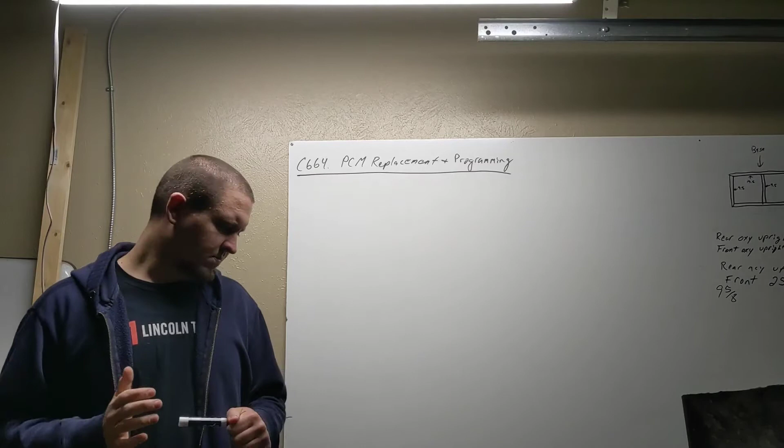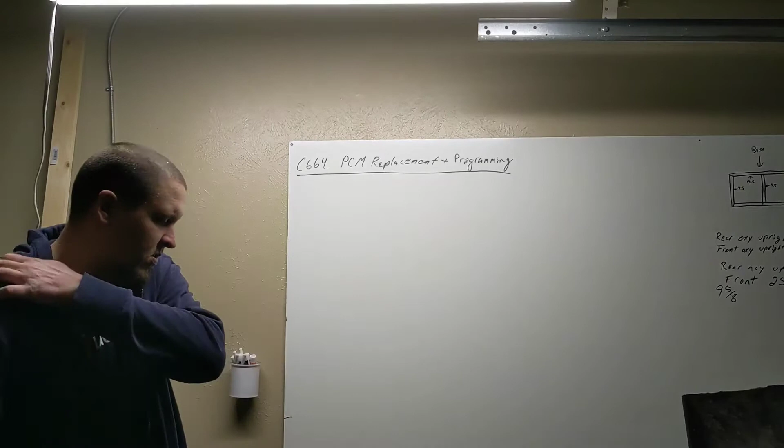To begin, we're going to use our scenario of a no-start condition. If you lose one of the major modules, a lot of times the whole network will go down, and if the whole network's down, the vehicle's just not going to start, because all these modules need to talk to each other to verify all the conditions are right for starting things up. Things like the PCM, the powertrain control module or engine control module, are responsible for sending the signal out to hit the starter. So if that module is down, we can't even start the vehicle. It can really take down the whole car if we have some module problems.

Before we get started, I just want to say that I was in the field for 15 years and I've probably replaced 5 to 8 PCMs, maybe. So it's not as common as people necessarily think.

A lot of times we get people from outside shops. Since I was at the dealer, outside shops would tow a vehicle to us and say, hey, we put a PCM in this thing, we just need you guys to program it. So they tow it to us, expect it to get programmed real quick, and then they drive it back home. But 99% of the time, we'd reprogram it and it wouldn't fix the vehicle. So it's not as common as you think.

A lot of people kind of get stumped and think, oh, well, it must be in this magic box that I don't know that much about. But the point of all this is for you guys to know some things about it so that you don't end up in that situation. That's just kind of the way it works.

But we've got our no-start condition. The first thing we want to do is check for codes. There's things we call U codes - those are always going to be communication codes. So if we look up a code in our PCM and we have a misfire, it's going to start with a P, and that's a powertrain code. Well, anything that starts with a U is going to be a communication code. So we need to scan all our modules and see if we have any communication codes. Say you lose a PCM, you may have communication codes in all of your other modules saying, hey, we can't talk to the PCM. That kind of points you in the right direction.

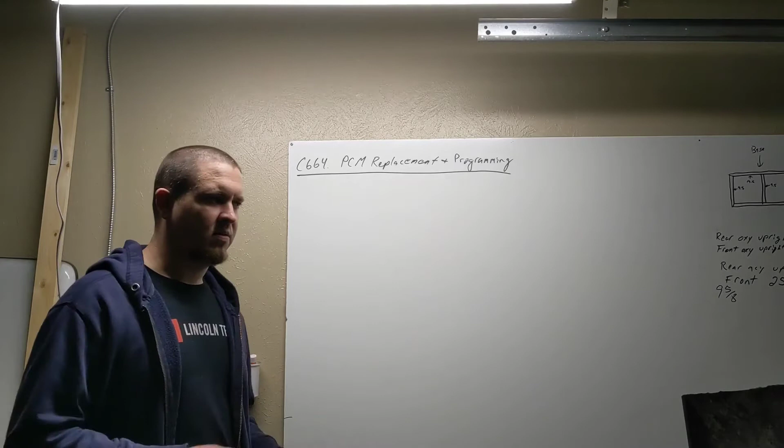But if you went with your scan tool and tried to pull codes out of the PCM, it would maybe say that module is not connected or it can't communicate or something. So there's another clue right there that you're in the right spot. That's what we need to do - this is the same thing with most of our other diagnostic strategies. We need to isolate and focus down and find out where our problem is. So we need to isolate which module isn't communicating, and then we can start testing from there.

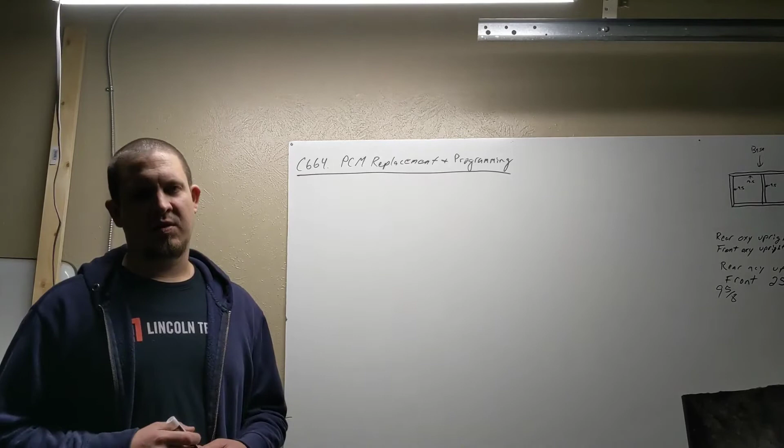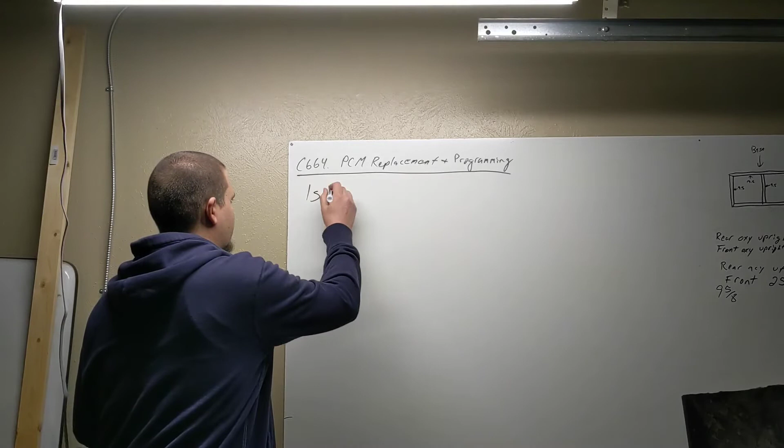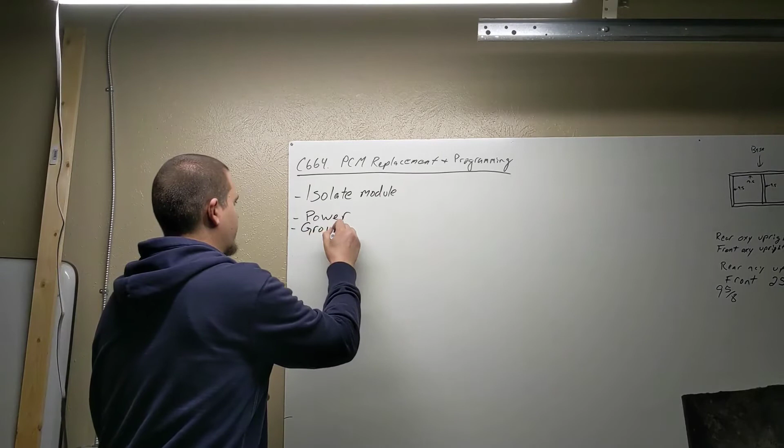So once we find out that our PCM isn't communicating, we need to basically check all our powers, grounds, and communication. So first we isolate. After that, there's three things that a module needs: power, ground, communication. That's what a module needs to operate. I mean, there's a little bit more to it, but if you have one that's not functioning properly, not talking to other modules, these are the things you need to look at.

Now there are some other things that can happen. I've replaced PCMs for things like injector drivers failing inside of them - it'll just have one fuel injector that can't turn on for whatever reason. But you can still communicate with it, you can still talk to the module. So this is more if we're not talking to it at all - power, ground, communication.

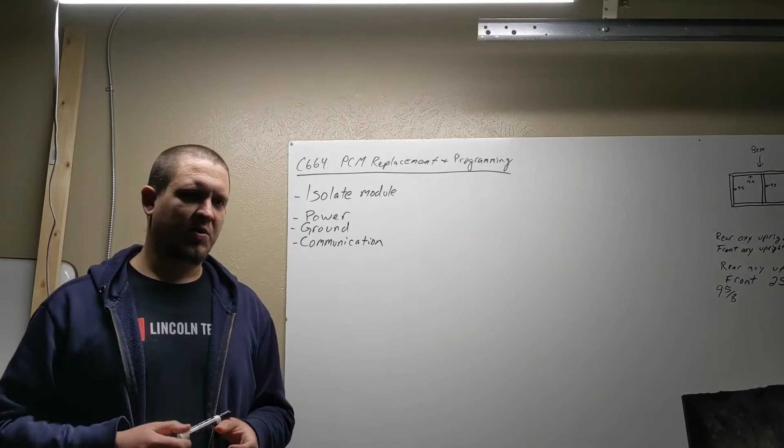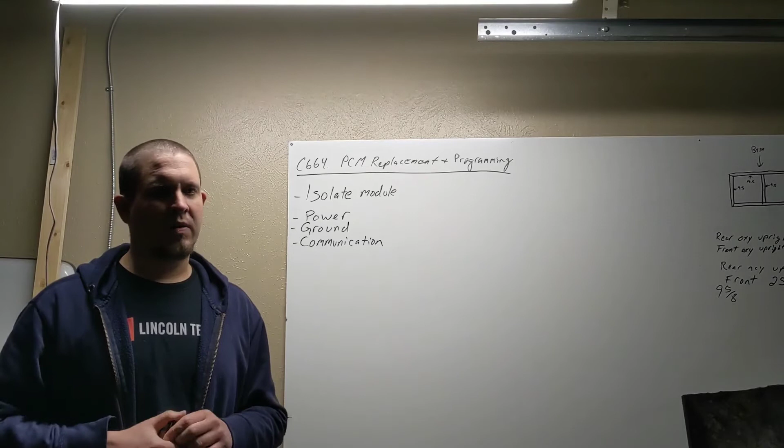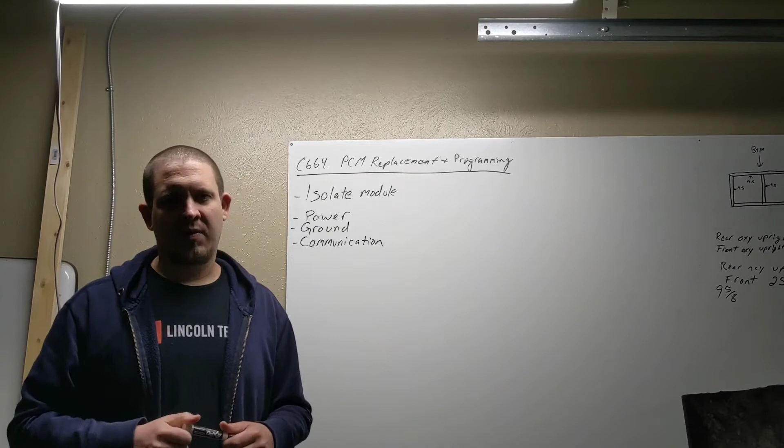So when I do power, you pull up a wiring diagram of your PCM. The other thing I like to do is pull up the connector end views, where it just shows all the different pins in the connectors. You want to look through all those diagrams and connector end views and look for anything that is power - anything that says battery positive or ignition feed or anything like that. There may be 20 different power wires coming to that PCM for various circuits. I'll check all of them, make sure you're not missing anything at all.

So it may take a little bit of digging to get around in there and actually find all of those power wires, but you really need to verify that it has everything that it needs.

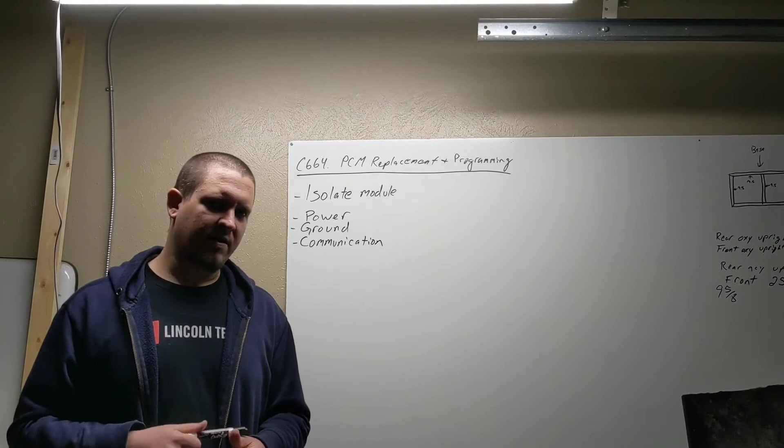After we verify we have all our powers, we need to do the same thing with grounds. We need to be looking at diagrams and connector end views and do the exact same thing with our grounds. Check all your grounds, maybe use an ohm meter, make sure you don't have a bunch of resistance on one. Obviously make sure you have continuity from your grounds to your battery.

You may need to run some voltage drop tests if you think you have a ground that's maybe suspect. Keep in mind that's another thing you can do, voltage drop tests, if you guys remember that from your basic electrical courses.

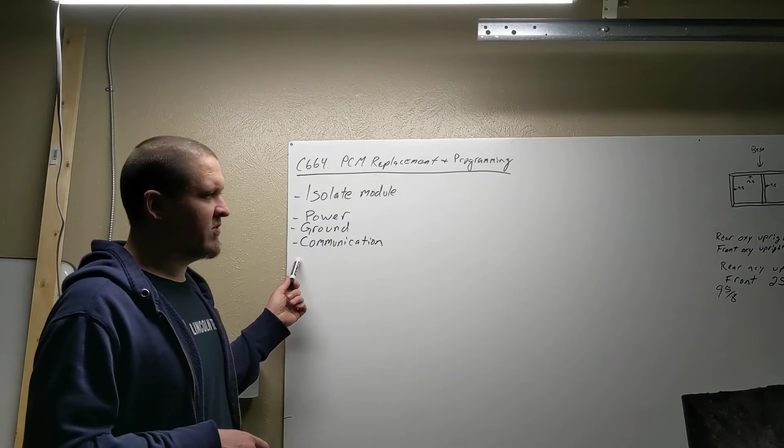After that, we need to look at communication, because we could have all our powers and grounds, but if for some reason our communication lines are down, we just can't talk to it. So we need to verify that we have communication, and that's kind of where the U codes come in. If a bunch of other modules are saying, hey, we can't talk to this thing, you need to check some of those data lines. You can do it the same way you'd check your powers and grounds, using an ohm meter to ohm out, say, from the PCM to a transmission controller or something, to make sure those high-speed data lines are up.

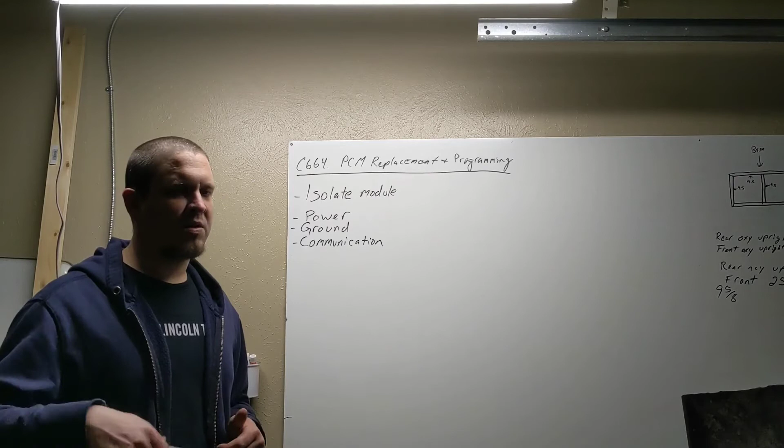I believe we'll talk a little bit more about this kind of stuff in some of the next units. So if some of these terms aren't really making sense to you, either ask me for a little more clarification, or we'll get there. I think some of that stuff's coming up. But we need to check our communication, make sure that all those lines are good.

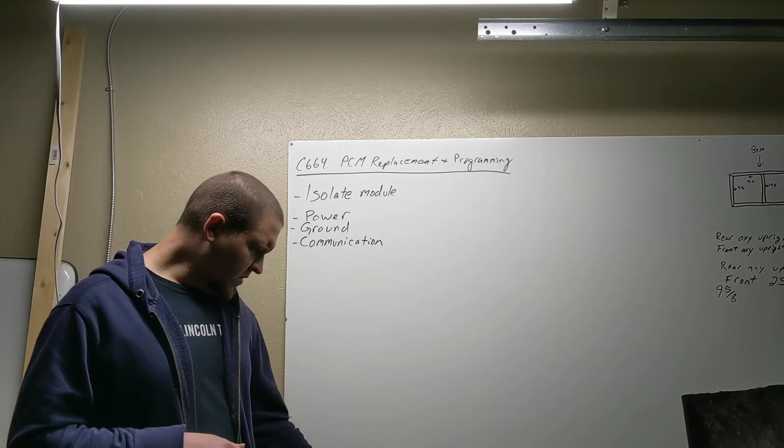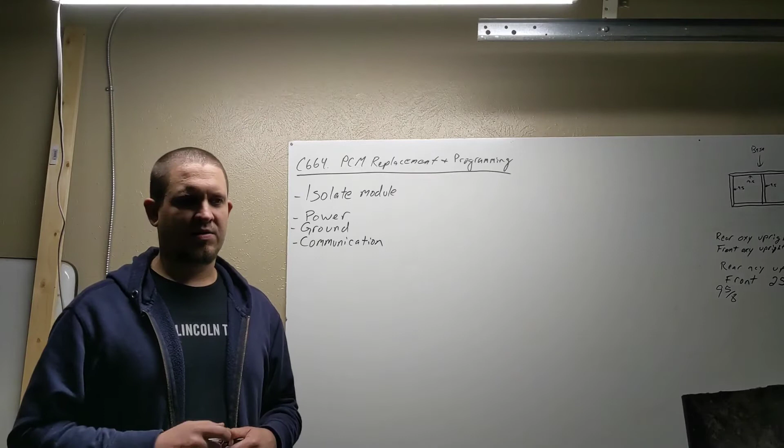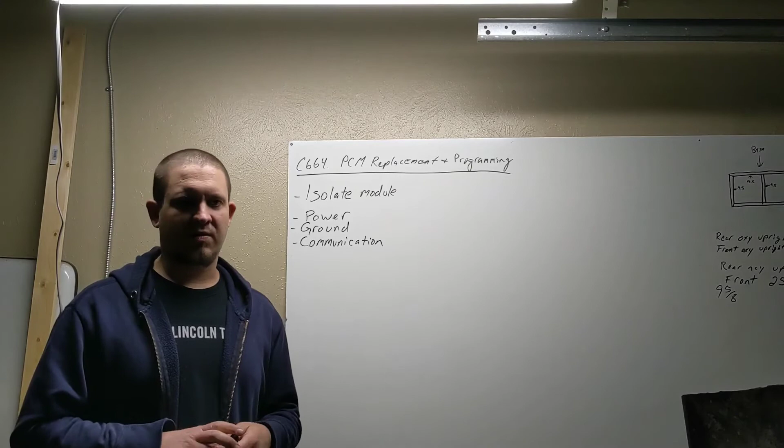Another thing we can do on communication, and I think this is one of the things coming up, is hook a meter or a scope up to our data lines. They'll produce a waveform also, like you guys saw in the other videos on the sensors, but they switch high and low. The sensor in the previous video, those were going 12 volts to 0. A lot of these data lines switch from like 2.5 volts to 0, and they switch real fast, and that's basically how they talk to one another. So you can pick that up on a scope to verify that there's data trying to come into the PCM. The PCM just isn't listening to it for whatever reason.

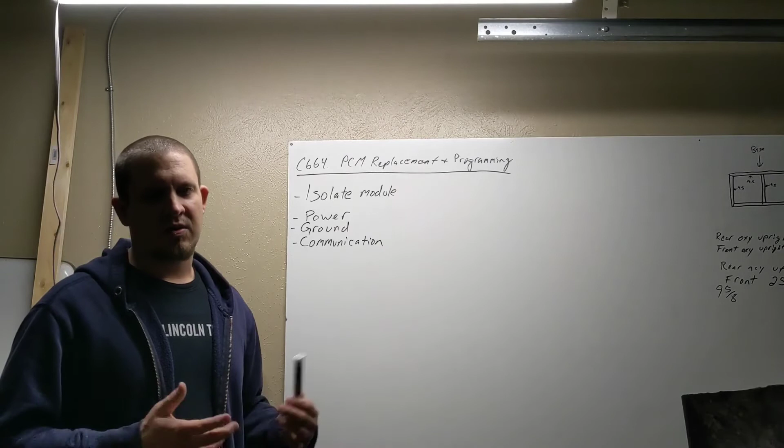So after we have checked our communication, we've got all three of these things that we need to have, and we know our module's dead for whatever reason. After that, we're going to replace our module.

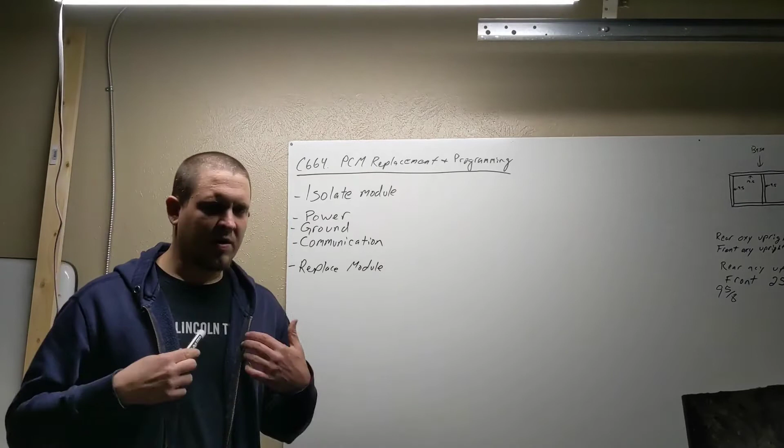So I'm going to talk about what I know specifically from my experience. I haven't reprogrammed modules on any other manufacturers but General Motors, but I have done a lot of programming on various modules over the years.

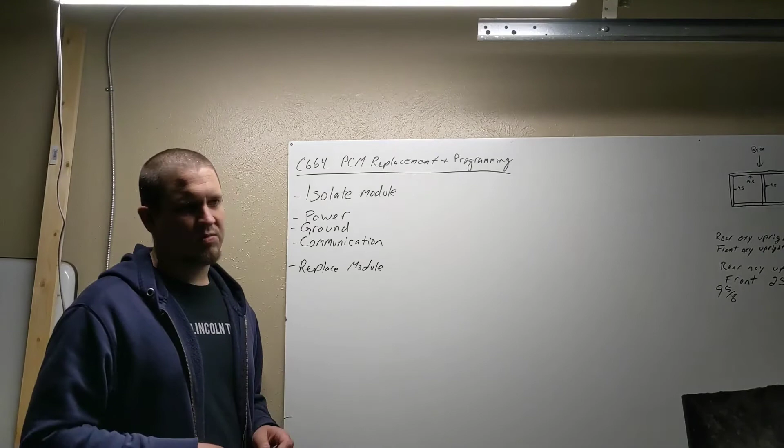There are some things you kind of need to know, and it's going to be a little bit different based on model and year. That's one thing that changes quite a bit, is how we're going to program stuff. Some of the older ones you had to take some steps before you replace the modules, even some of the newer ones too. So make sure you're checking service information.

For your programming steps.

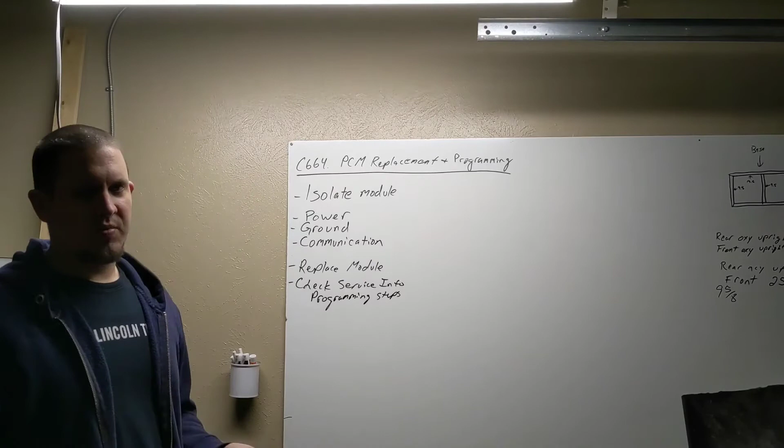If your module's completely dead, obviously you're not going to be able to pull maybe your old VIN or something out of the old module, but you may need to put in a VIN, especially if you're doing a powertrain control module.

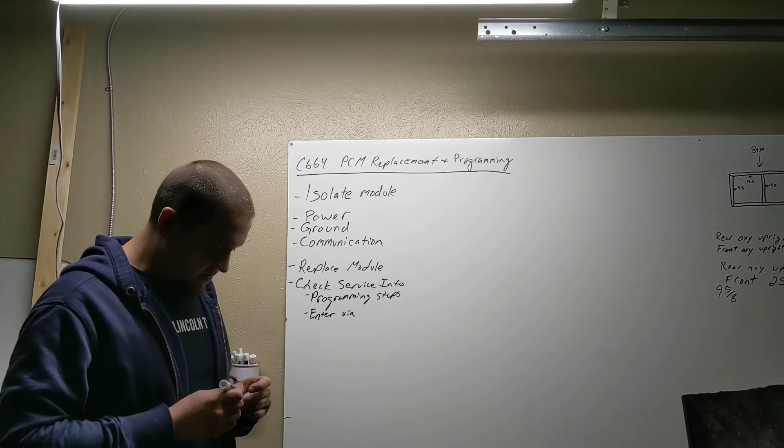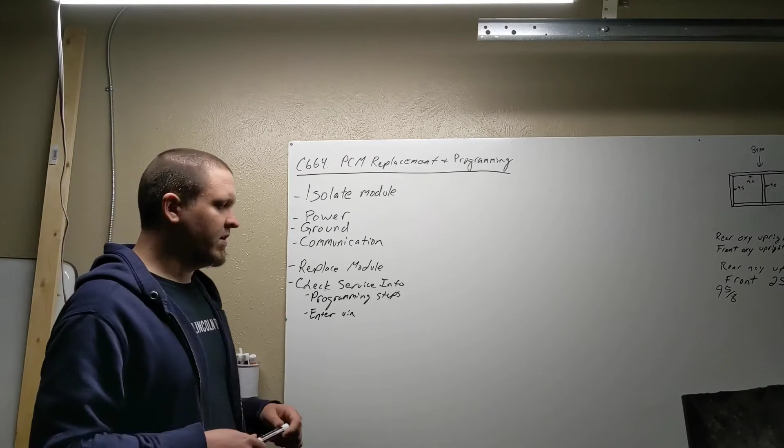Once we get started on our programming procedure, and I'm going to try and find some videos that kind of show this also, some of the steps on how you actually do this stuff. But if you need to enter a VIN, you're going to enter a VIN. Sometimes you'll need to choose a specific calibration, so there may be some options.

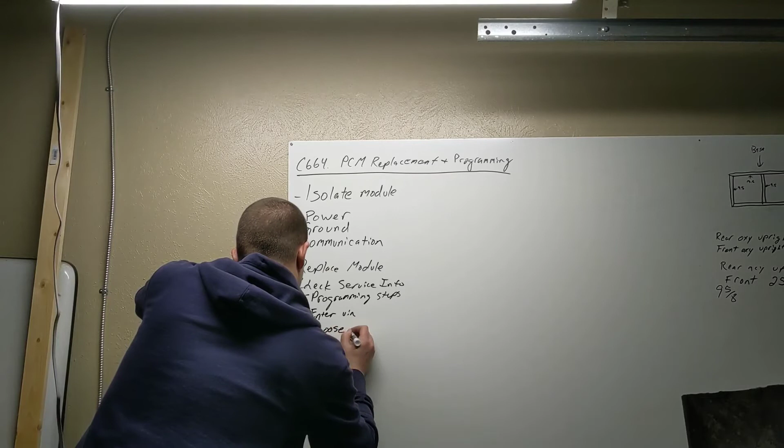And some of the options may say, pick this calibration if you have a pickup versus an SUV, or if you have this engine versus that engine. And there's something else in the GM world they call RPO codes. That means regular production options, and that's just options that the vehicle may or may not have. So sometimes you have to go in there and select those things specifically, and you may need to look up specifics about the vehicle to actually find those.

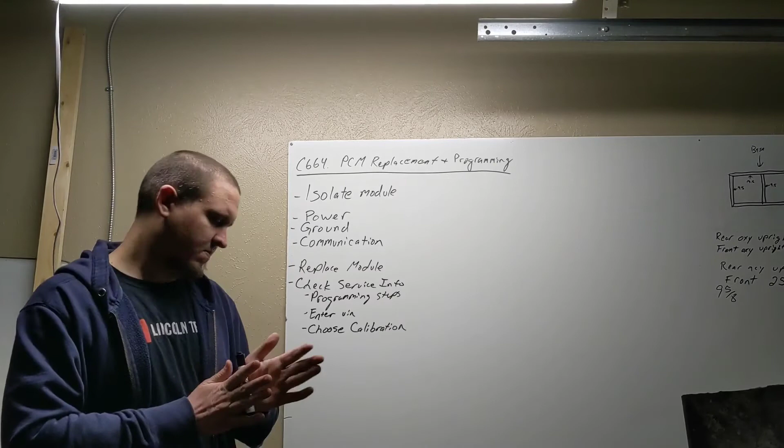But you may have a different calibration in there if you have, say, a 6-speed transmission versus an 8-speed, or if you have this kind of climate system or that kind of climate system. So it just kind of depends, and it's going to be different for pretty much every vehicle. It's kind of important that you get the right calibrations in there, or things just aren't going to work right.

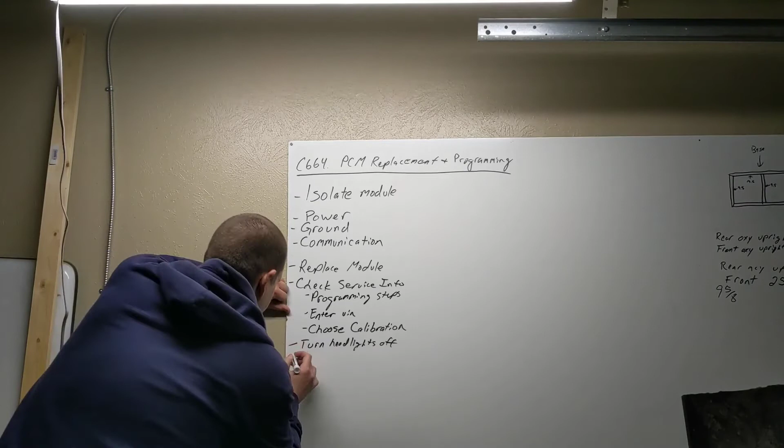One thing to note: sometimes programming takes a little while, could take a half hour all said and done, but you're just sitting there with the key on. The last thing we ever want is for the battery to go dead while we're in the middle of programming. So one of the first things I always do, whether reprogramming or not, when you pull a vehicle in with the key on but engine off, is turn your headlights off. That's a big draw on your battery and it's pretty unnecessary in the shop. But we need to maintain our battery voltage.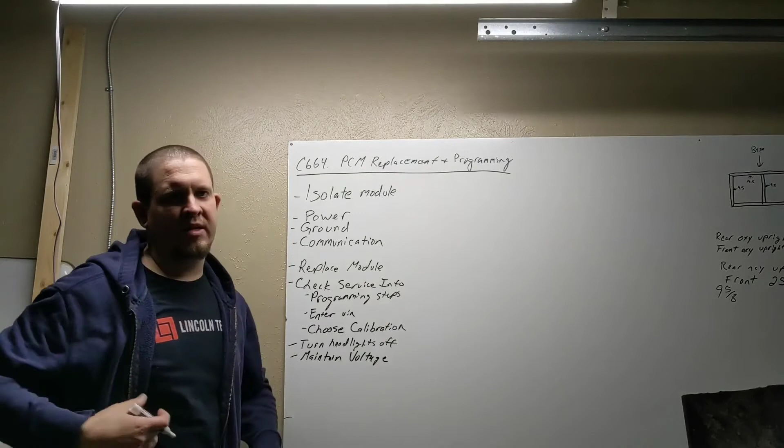There's two different ways we can do this. You can use some sort of battery charger or maintainer, or you can use a jump box.

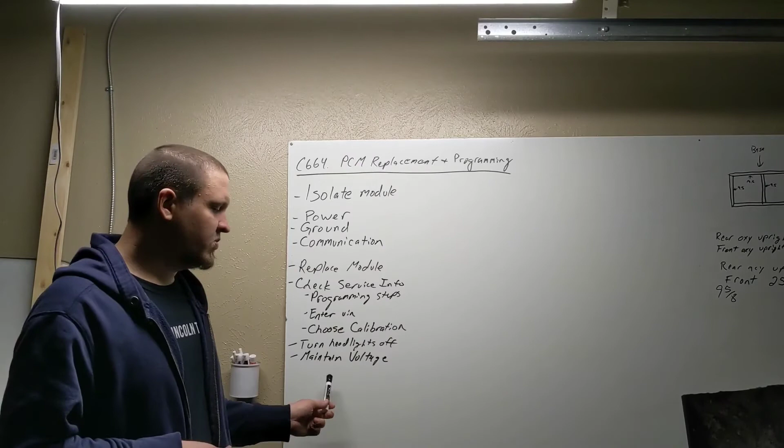Now, things that need to be said about that. A standard battery charger that you get from a normal store, that you probably have in the shop and may have used before - don't use a regular battery charger. Those things don't put out very clean power. They're fine for charging a battery, but when you're reprogramming and putting data into a module, there's a thing called AC ripple, and it's measurable. You get a little bit of AC voltage, a little bit of noise that comes into the system when we use these battery chargers, and it can mess with your programming. So don't use your regular old battery charger.

Some of them can specifically be used as a power supply, or what we call a battery maintainer, and those give out very clean DC voltage. If you measured it with a meter, it's just a flat line, straight DC voltage. If any of you guys have used the Midtronics GR8s we have at the school, those have a power supply mode and supply clean voltage, so you could use one of those. Midtronics also had a battery maintainer they pushed out to all the dealerships years ago, specifically for maintaining voltage for programming. They won't charge a battery or do anything like that - they're only meant to keep that voltage up so we don't die while programming the module.

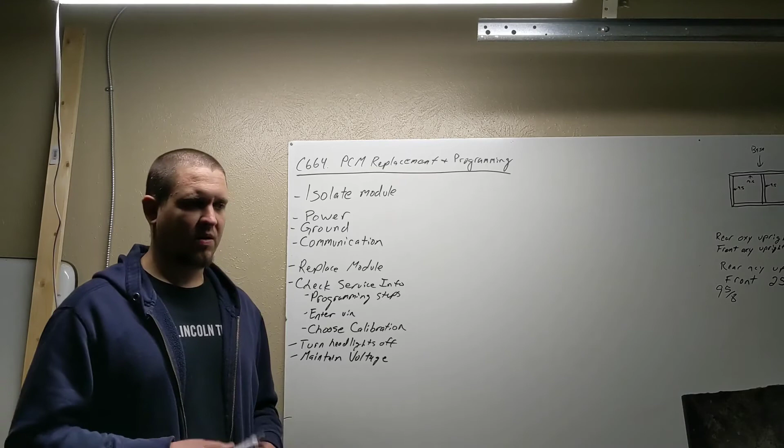Now, the other way you could do it is with a jump box. That's the way I always did it, just because I had one. It's not a charger, but it's going to assist - it helps keep that battery voltage up. It's just hooking another battery to the vehicle, so there's no AC ripple or anything in there. It's just going to take a lot longer for the battery and jump box to drain versus just the battery alone. So it's a whole lot quicker and easier - you don't have to worry about a bad charger messing up your program. That's what I would always do if I had a jump box handy. It's something to keep in mind because it can cause problems.

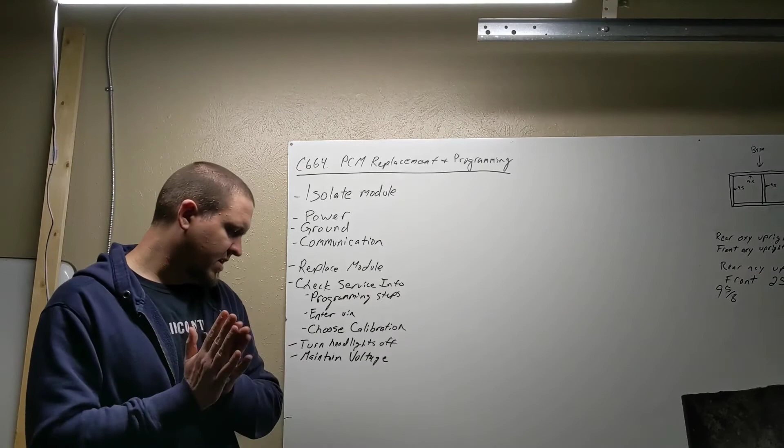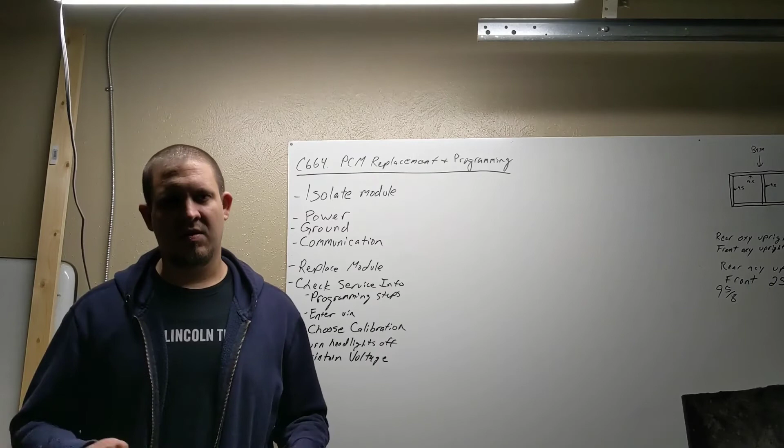So after we've got our battery voltage maintained, we can go ahead with our programming. Once you start it, it's going to do its thing - load in its program, and then it'll probably give you some prompts, maybe make you make some decisions, tell you to turn the ignition on and off, that kind of stuff. So you have to be around when this is going on. It's not completely automatic, but for the most part it's going to put in its program and be done.

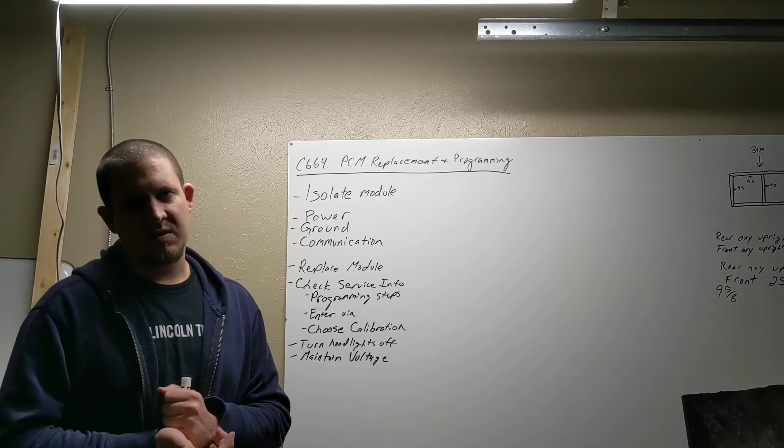If you're in a dealership setting, it's probably going to give you some sort of warranty claim code that you'll have to put on your repair order just to verify you actually programmed a module. I don't know if that's the same for all manufacturers, but we had to do that for every module reprogrammed with GM to get paid for the claim. You had to include that code, and they could actually pull that code up in a log and see if you actually did it, giving them some specifics on it, so they can verify.

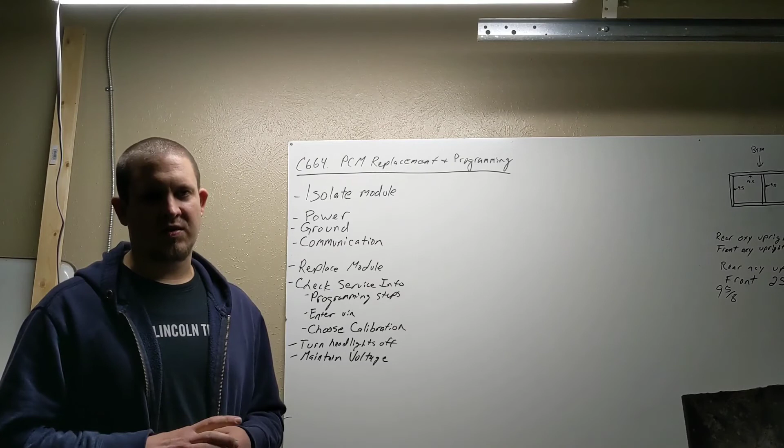After we're done programming, there are sometimes a few more things that need to be done, and sometimes it's just part of the programming process. But one of the biggest things, especially if it's a powertrain or engine control module, is you're probably going to have to relearn the anti-theft system. It just depends on what kind of system and what the steps are - you may need to relearn the keys. Sometimes, if you put a PCM in there, you need to get a hold of the customer and say you need to bring me every key for this car that you have, and you'll have to relearn all of the keys to the vehicle, or else you'll give the customer their car back.

Mom's keys will work fine, and then dad goes to drive it and all his keys don't work and they won't start the vehicle. So you need to make sure you have all of those in your possession if you have to go through some anti-theft.

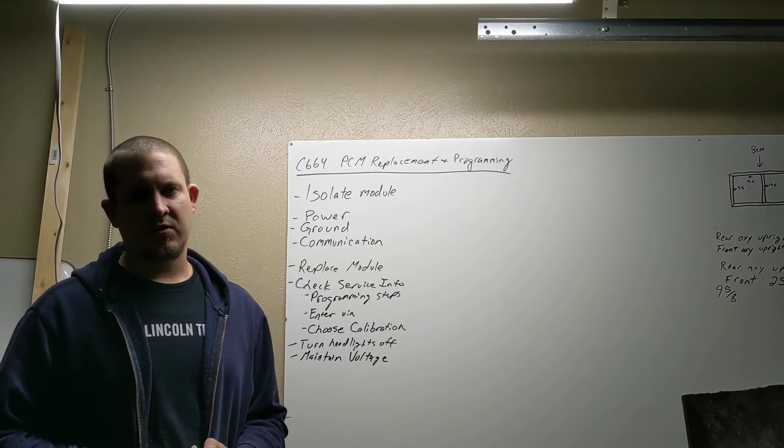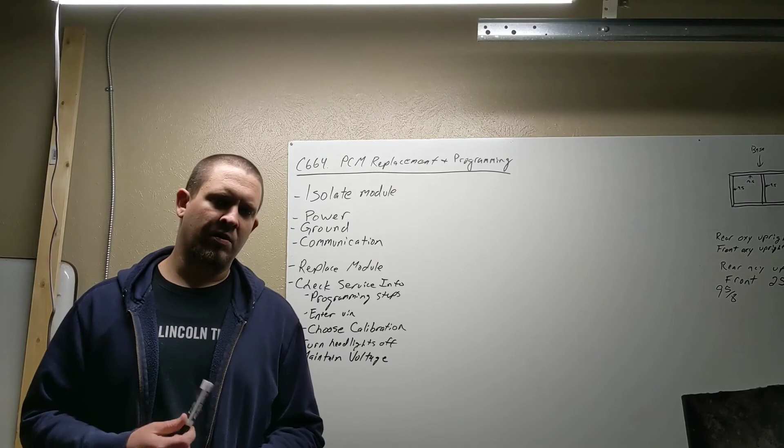Sometimes you'll need to relearn the key fobs. Sometimes you'll need to relearn the idle. Most of these vehicles now have a learned idle value, so over time they compensate for any crud that builds up in the throttle body. So you may need to go in there and do an idle learn reset. They may not run right until you do that.

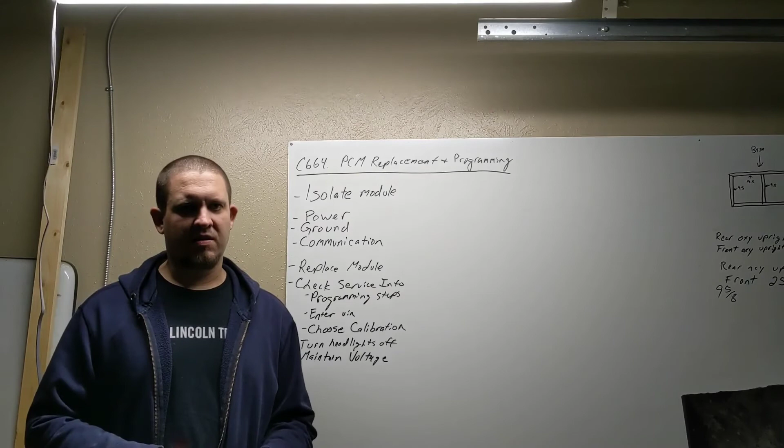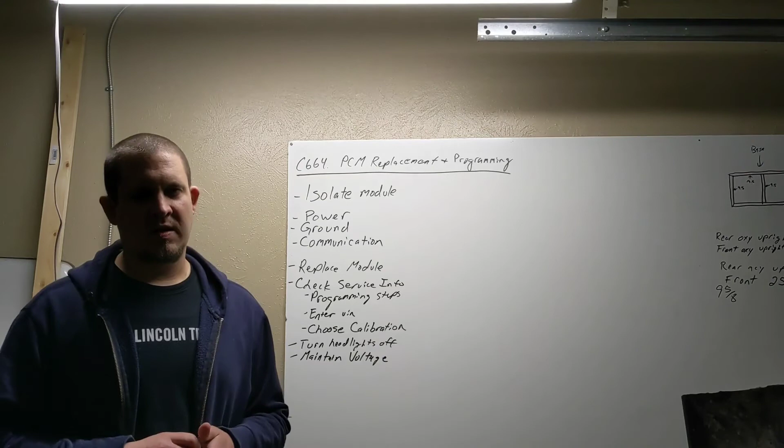On the GM side, there's another thing called crankshaft variation. We were talking about crankshaft position sensors. Well, there can be a little bit of variation in crankshafts, engine to engine, or in your sensors on all your circuits. So GM puts a special function in there called a crankshaft variation relearn. Basically what you do is get the vehicle hot, go into this special function, and command a relearn. It has you rev the engine up, sitting there in neutral, up to about 4,000 RPMs, and it watches for any variation in that crankshaft. It learns that one specifically. So you may need to do some sort of variation learn on the crank. I don't know if other manufacturers do that, but GM's been doing that for a really long time.

So that's another thing you'll probably have to do after a PCM replacement. And just while we're talking about it, if you ever replace an engine in a GM vehicle, you'll probably have to do that also after an engine replacement.

On some of the real old ones, you may have to do some weird stuff like set up the tire pressure monitor system. You may have to go in and tell it what size tires and what pressure you're running, or the sensors will be off. But most of that is included in the programming now, so you may not have to tell it tires and pressures, but you'll probably have to relearn all the sensors to the module. That just depends on if that functionality is in the PCM or in a different module. So it just kind of depends.

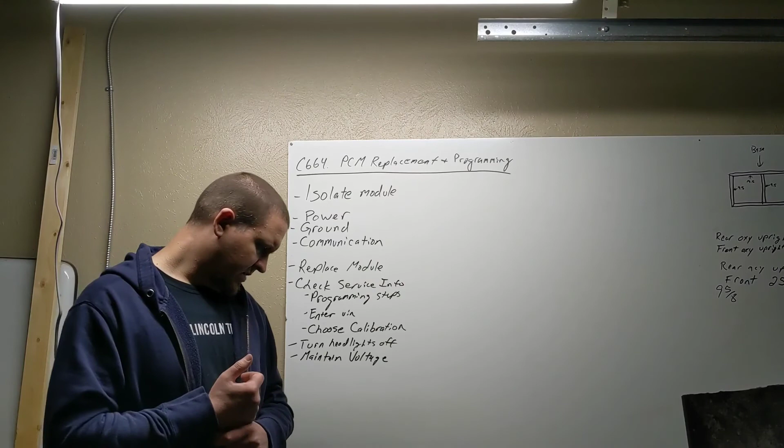Like I said, all this stuff's going to be different. But after that, we just need to clear codes, and then do the thing we always do every time we do a repair: verify that our repair is correct. Whether that includes a test drive or letting it sit and run in your stall for a while, checking to make sure the codes that were there before aren't coming back, you always need to verify your repair.

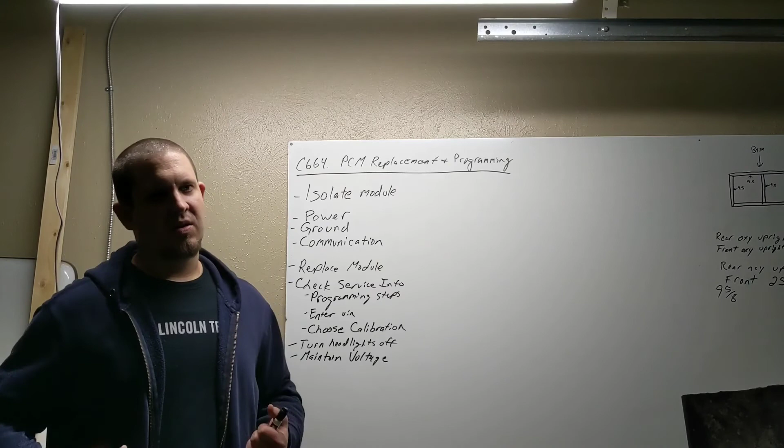So after you've verified your repair, you can return your vehicle to the customer.

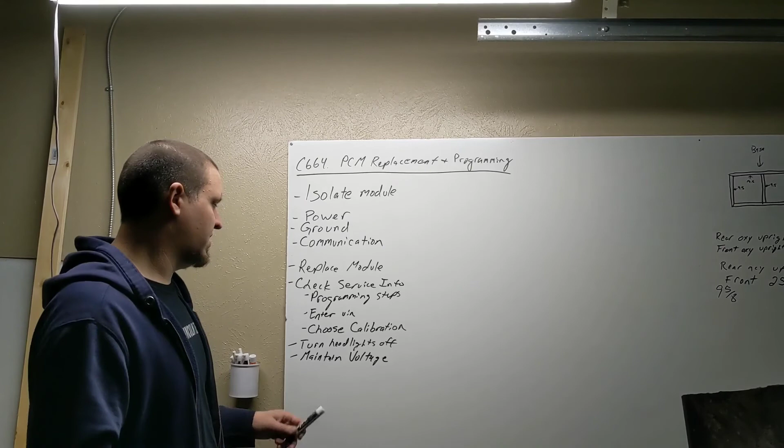It sounds kind of complicated, and there are a bunch of moving parts to this, but after you've gone out there and done this a couple of times, it's really not that big of a deal. A lot of these steps from top to bottom, maybe not the VIN and crank relearn and all that, but all this stuff is pretty much going to be the same for any control module. They all need power, ground, communication, and they're all going to need these same kind of programming steps. They just may have their own unique ones once you get down towards the end, if you have to do any kind of relearns. That's where they're going to differ from one another.

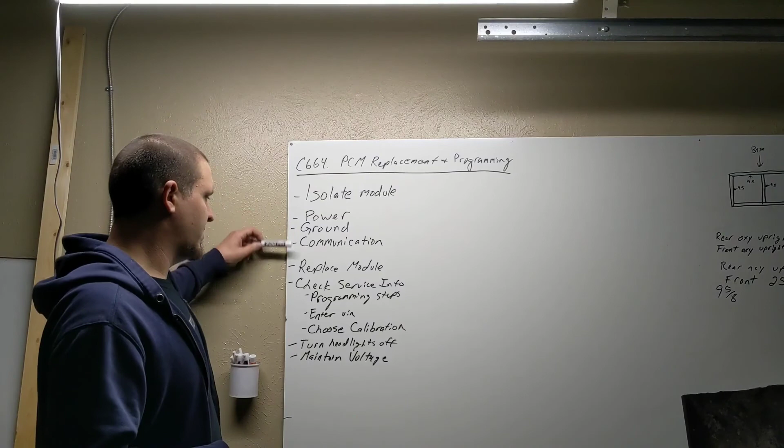But the diagnosis and the programming steps are probably going to be the same for pretty much all the modules. It's just the specifics that are a little bit different.

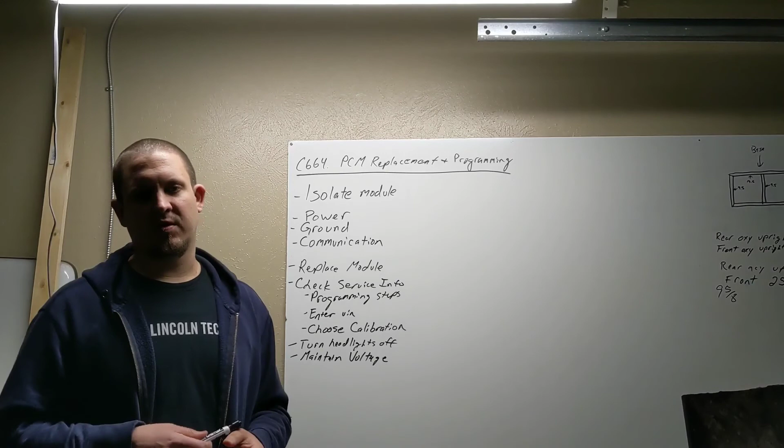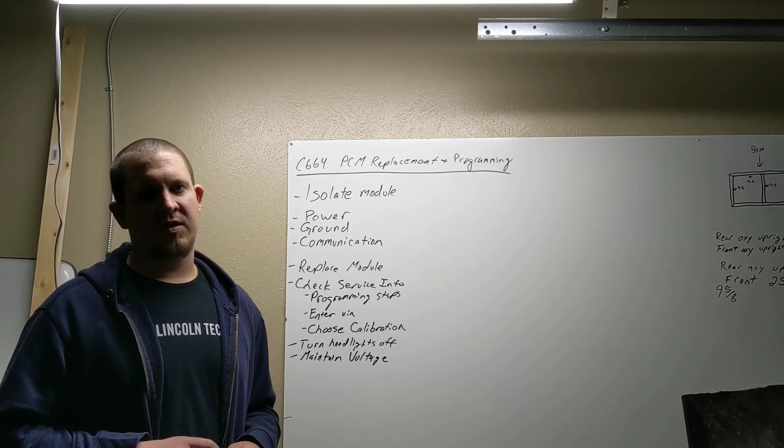That's my experience with replacing and programming modules. Like I said, other manufacturers may be a little bit different, but this is what I've had to do in the past. So you can use this and fill out that task sheet.

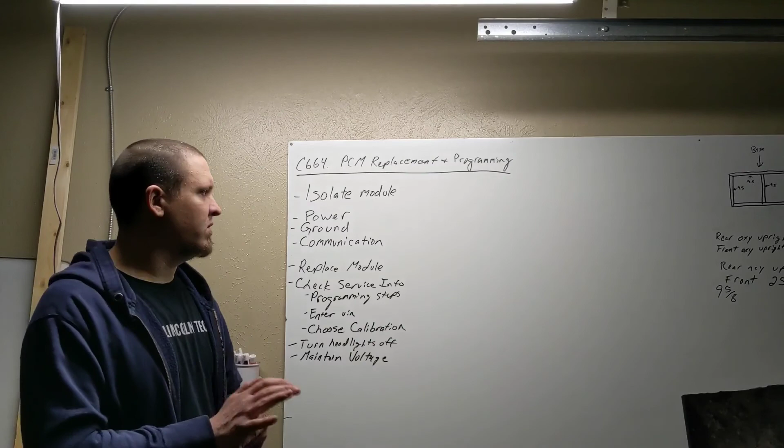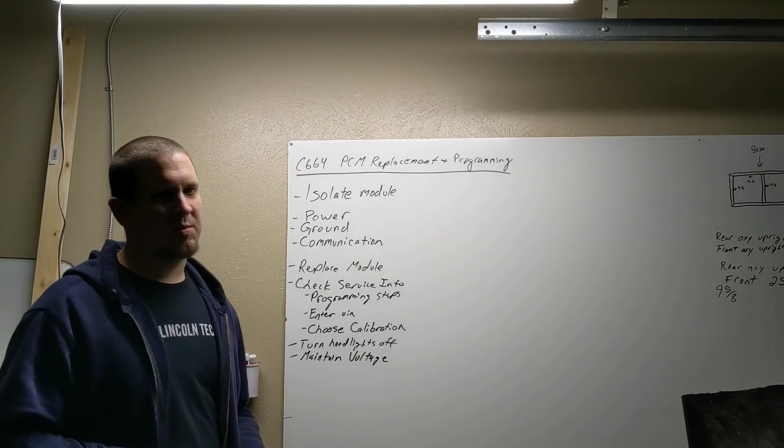Again, we were kind of pretending like we have a no-start condition, which a module like this would cause. So our testing steps are going to be power, ground, communication, and then we've got some programming kind of stuff down here at the bottom. So use that to fill out that task sheet, and that's going to do it for today. Thanks.